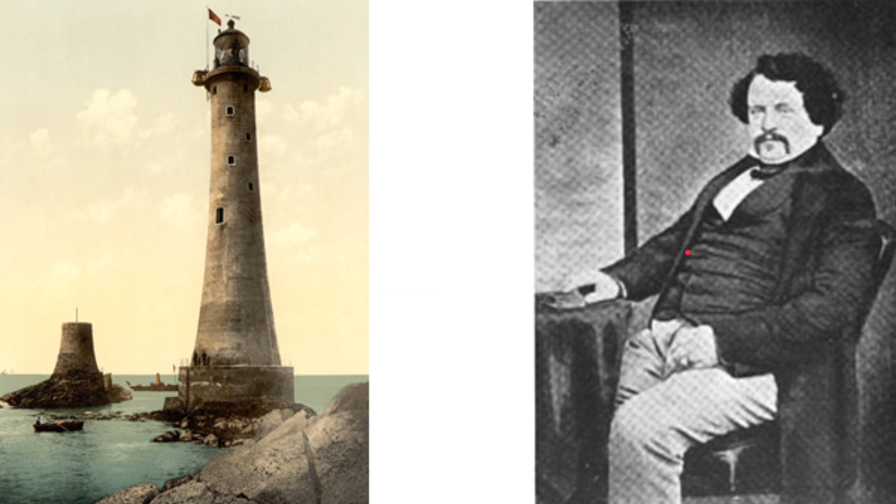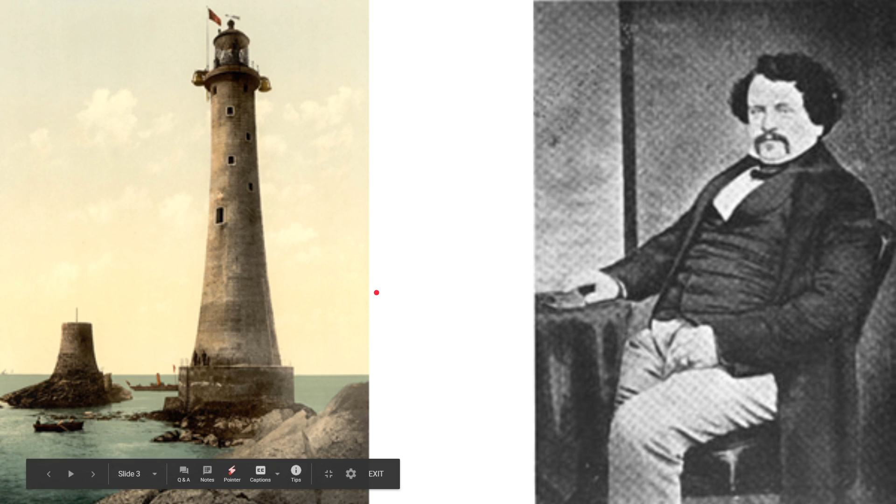In 1756, John Smeaton rebuilt Eddystone Lighthouse. This lighthouse is actually a product of trial and error. The first lighthouse was made out of timber, the second oak and iron, and then on the third, John Smeaton revolutionized the construction of such towers made entirely of interlocking stone. It stood there until it was replaced 123 years later by Sir James N. Douglass, which now rises 49 meters above water.

Then, in 1824, Joseph Aspdin, another Englishman, discovered and patented Portland cement. Since that time, a number of developments and improvements have been made in the production process and cement properties. Cement is a material having cohesive and adhesive properties which provides bonding action to other concrete ingredients. It is the most important ingredient of concrete, and it was patented by Joseph Aspdin.

We go now to what makes up concrete. Concrete is basically made out of cement, water, and the aggregates, fine and coarse. Cement has been discussed earlier. Now, water used in concrete must be clean.

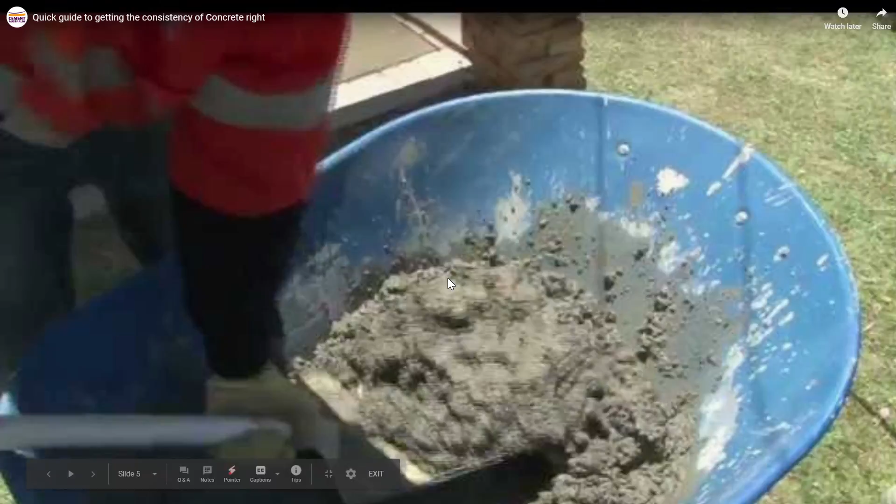For given materials, the strength of the concrete, so long as we have a plastic mix, depends solely on the relative quantity of water as compared with the cement, regardless of mix or size and grading of the aggregate. To prove this fact, where water-cement ratio is a must, we have this video to show you just the right consistency of our concrete mix.

Too wet, meaning too much water. And then this is too dry.

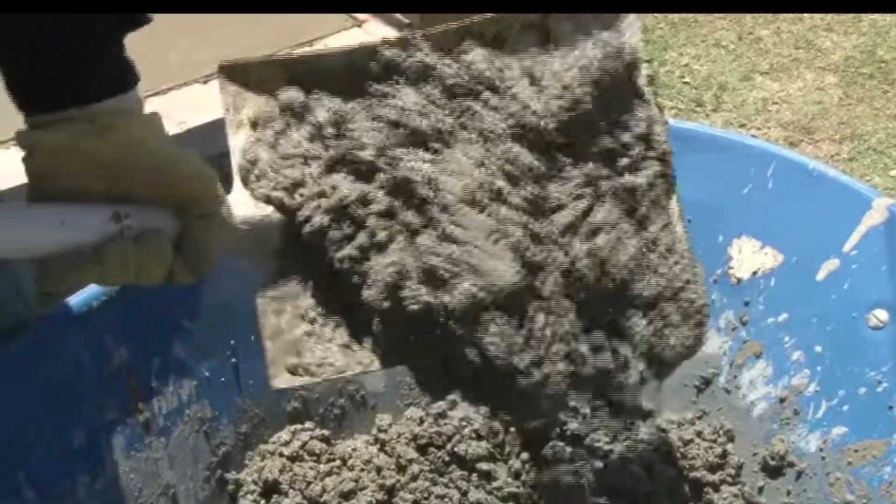Some would even describe that as the texture of a cookie dough. Now, let's go to the aggregates. We have these types of aggregates. Coarse, specifically, we have flat, elongated, angular, and round.

The best type of coarse aggregate, they've said, is the round aggregate. Rounded aggregates are suitable to use in concrete because flaky and elongated particles reduce workability, increase water demand, and reduce strength. In the case of angular particles, the bond between aggregate particles is higher due to interlocking, but due to higher surface area, angular particles increase water demand and therefore reduce workability.

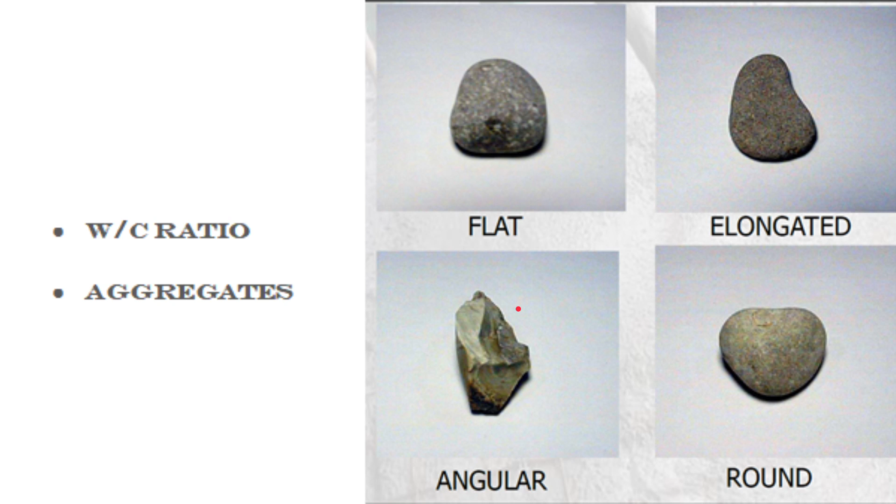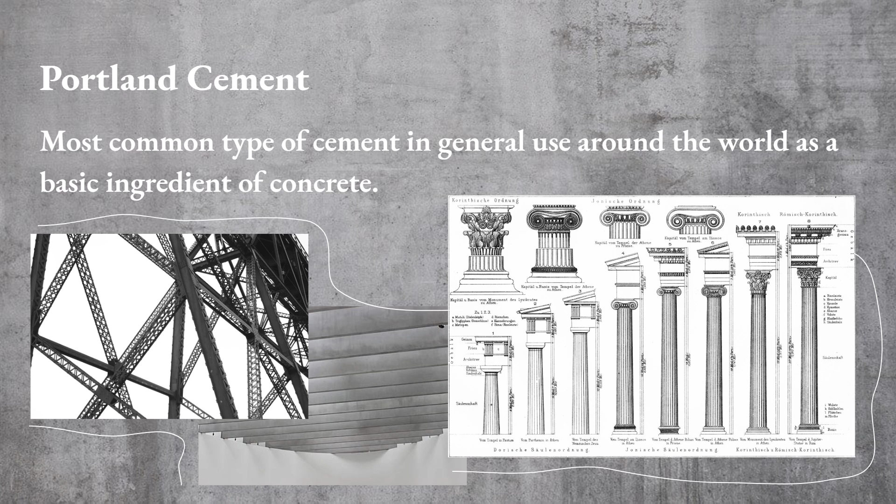And that is it for part 1 of the report on concrete. In continuation, concrete is strong in compression but weak in tension. For this reason, it works well in columns and posts. When used for tension members such as beams, foundation walls, or wall concrete, it must be reinforced to attain necessary tension strength.

According to the American Society for Testing and Materials, there are 5 basic types of cement. Type 1 is used for general construction purposes. It is also called ordinary Portland cement. It is used for bridges, buildings, and precast construction. Type 2 is moderate sulfate resisting cement. It is used for structures in water or soil containing moderate amounts of sulfate or when heat buildup is a concern.

It is used for substructure or for foundation and basement walls. Type 3 is used when high strength is desired at a very early period. It is useful during cold weather concreting where quick strength gain is a factor. It produces more heat than type 1.

Type 4 is used where the amount and rate of heat generation must be kept to a minimum. It produces less heat during the hydration process, thus useful for hot weather concreting. It is useful for producing large quantities of concrete, which is meant for massive structures such as dams. Due to its limited use, it is produced by manufacturers only on special requests.

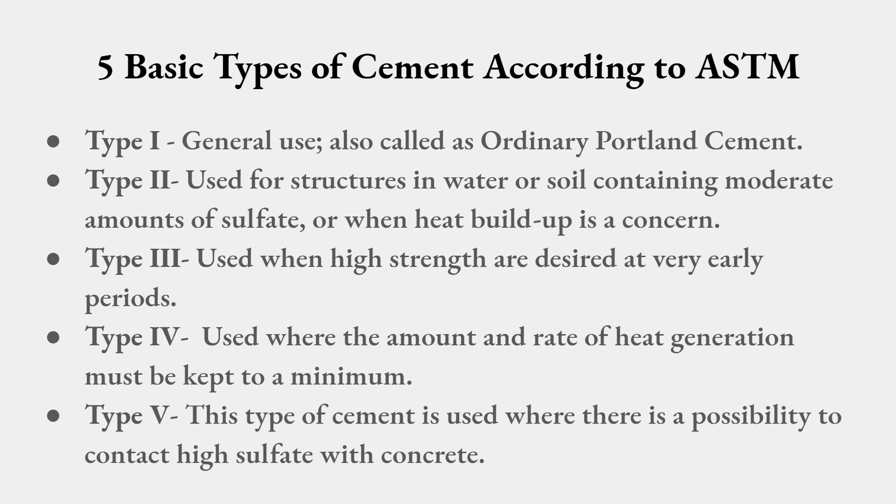Other than this, types 1A, 2A, and 3A are cements used to make air-entrained concrete. They have the same properties as types 1, 2, and 3, except that they have small quantities of air-entraining materials combined with them. When mixing concrete, water is essential. Water must be clean because, for example, seawater contains salt, which may lead to corrosion of reinforcing steel.

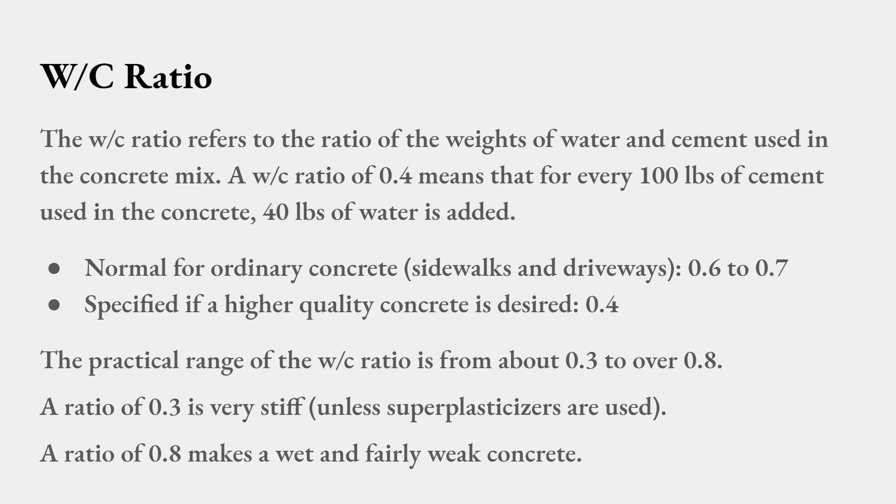Water-cement ratio. Water-cement ratio is the weight of water to the weight of cement used in a concrete mix. A water-cement ratio of 0.4 means that for every 100 pounds of cement used in concrete, 40 pounds of water is added. The normal water-cement ratio used in ordinary concrete for sidewalks and driveways ranges from 0.6 to 0.7.

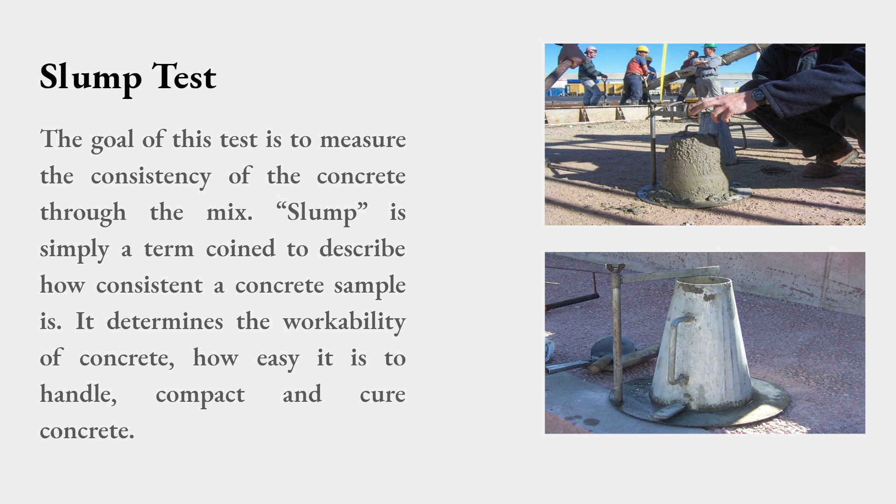Slump test is a test used to measure the consistency of fresh concrete before it sets. The word slump is simply a term coined to describe how consistent a concrete sample is. It determines the workability of concrete, how easy it is to handle, compact, and cure concrete. The properties of concrete will be discussed by Judge Avanzado.

Properties of concrete. Number 1, grades of concrete. Concrete is known by its grade, which is designated as M15, M20, etc., in which letter M refers to concrete mix and number 15, 20 denotes its specified compressive strength of 150 mm cube at 28 days, expressed in Newton per millimeter squared. This is the different grades of concrete and their applications.

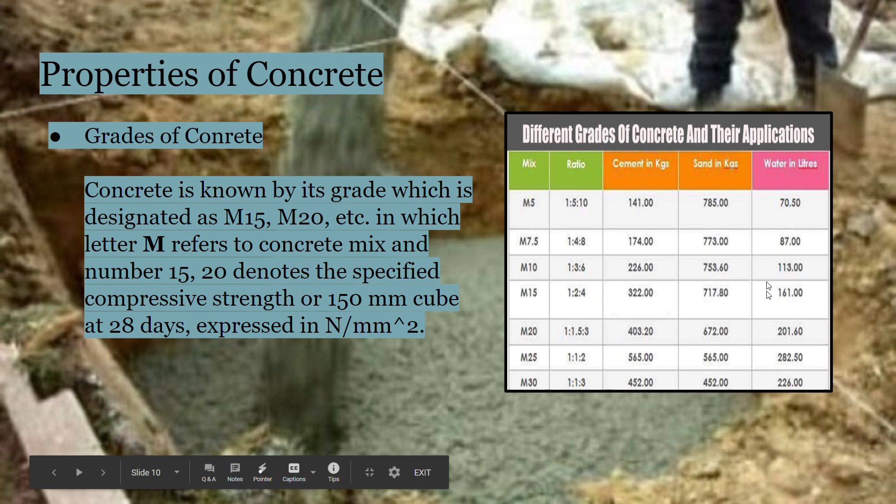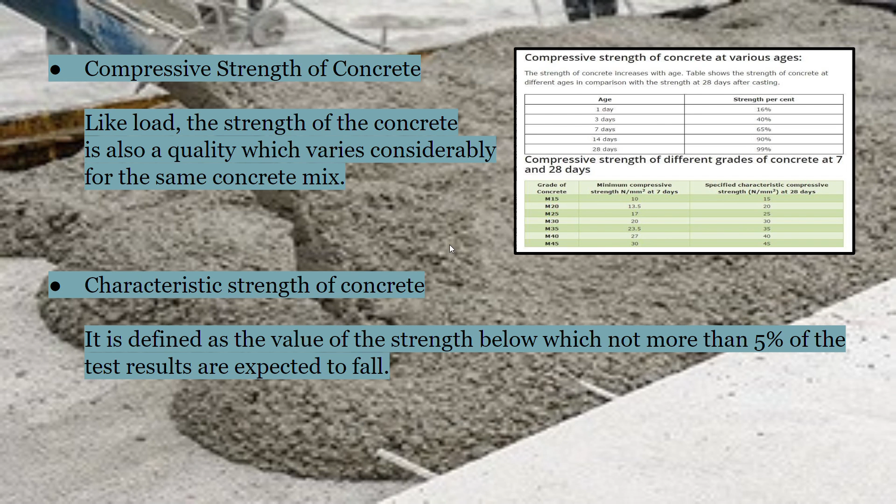Compressive strength of concrete. Like load, the strength of the concrete is also a quality which varies considerably for the same concrete mix. These are the different compressive strengths of concrete at various ages. Next one, the characteristic strength of concrete. It is defined as the value of the strength below which not more than 5% of the test results are expected to fall.

Tensile strength of concrete. The estimate of flexural strength of concrete, or the modulus of rupture, or the cracking strength of concrete from cube compressive strength is obtained by the relation FCR equals 0.7 √FCK Newton per millimeter squared. The tensile strength of concrete in direct tension is obtained experimentally by split cylinder. It varies between 1/8 to 1/12 of cube compressive strength.

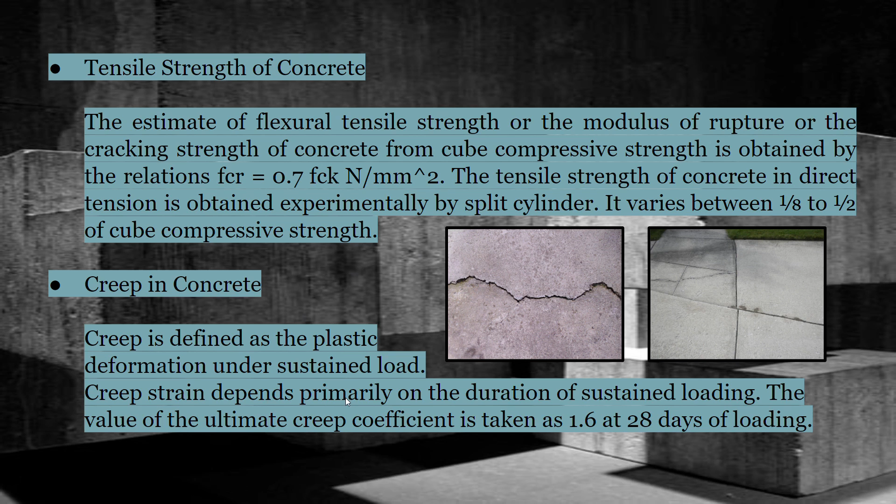Creep in concrete. Creep is defined as plastic deformation under sustained load. Creep strain depends primarily on the duration of sustained loading. The value of the ultimate creep coefficient is taken as 1.6 at 28 days of loading. These two pictures are examples of creep in concrete. Shrinkage of concrete. The property of diminishing volume during the process of drying and hardening is termed shrinkage. If this strain is prevented, it produces tensile stress in the concrete and hence concrete develops cracks.

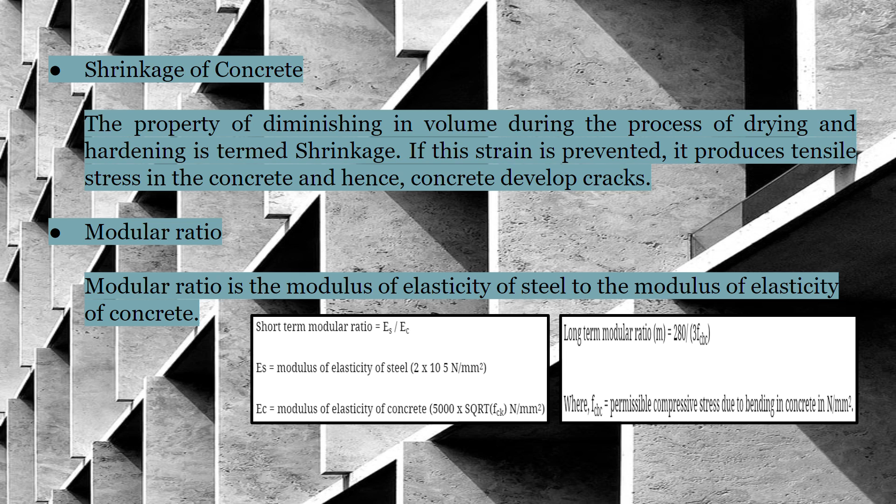Modular ratio. Modular ratio is the modulus of elasticity of steel to the modulus of elasticity of concrete. Poisson's ratio varies between 0.1 for high-strength concrete and 0.2 for weak mixes. It is normally taken as 0.15 for strength design and 0.2 for serviceability criteria. Next, durability of concrete. It is the ability to resist disintegration and decay. One of the chief characteristics influencing durability of concrete is its permeability to ingress of water and other potentially deleterious materials.

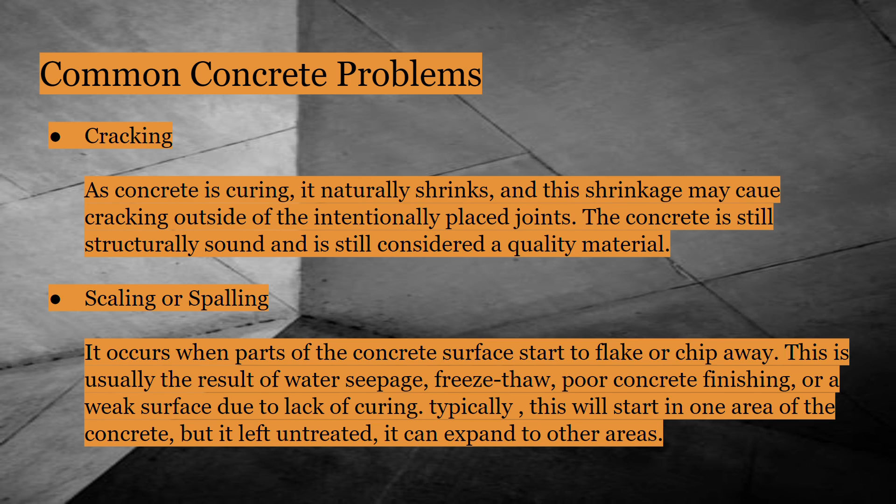It occurs when parts of the concrete surface start to flake or chip away. This is usually the result of water seepage, freeze-thaw, poor concrete finishing, or a weak surface due to lack of curing. Typically, this will start in one area of the concrete, but if left untreated, it can expand to other areas. Discoloration. It can occur for a variety of reasons such as weather conditions, material exposure, and even curing time.

Crazing. It refers to a network of fine cracks that do not extend below the surface. It is more of a cosmetic issue than a structural issue, which means that even if it has crazing, the concrete is still sound. These are the examples of the common concrete problems.

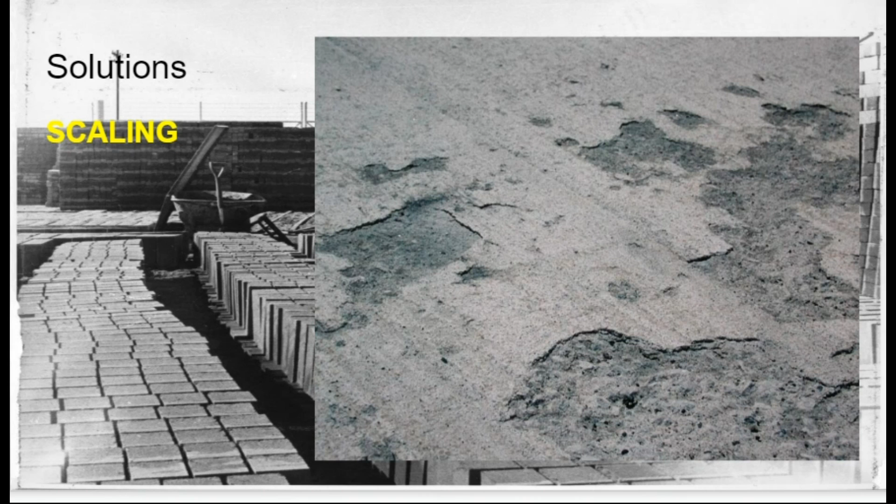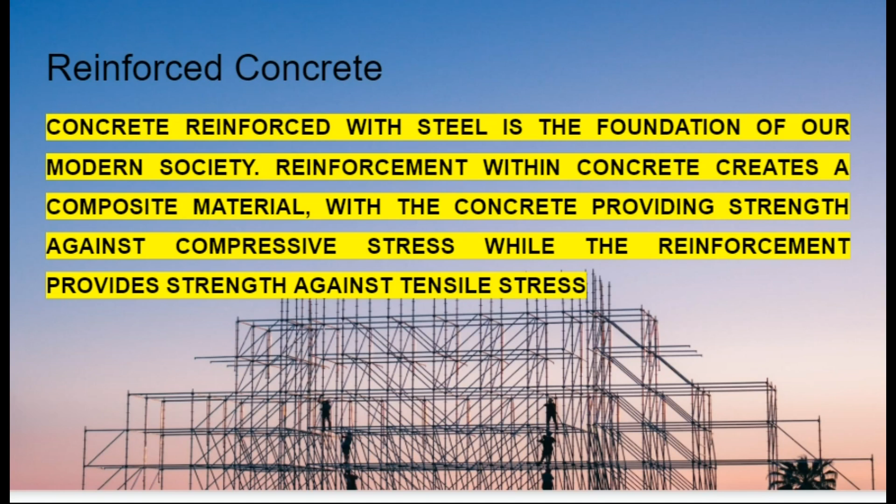Next, reinforced concrete. So, sa reinforced concrete, actually, hindi na sa akin to, pero kasama dun siya sa PowerPoint ni Sir. Concrete reinforced with steel is the foundation of our modern society. Reinforcement within concrete creates a composite material with the concrete providing strength against compressive stress, while the reinforcement provides strength against tensile stress. So, ano ba ibig sabihin nun?